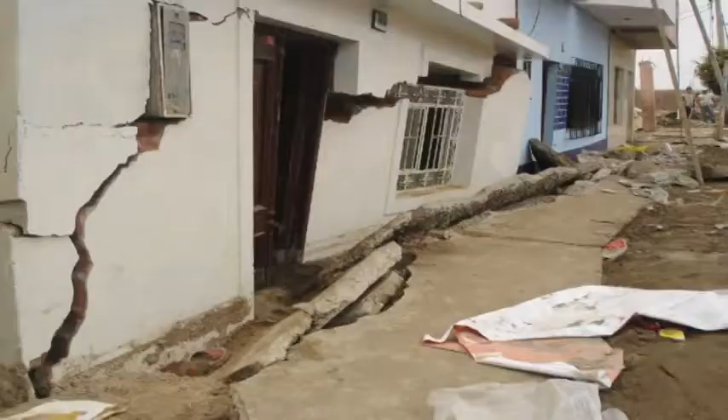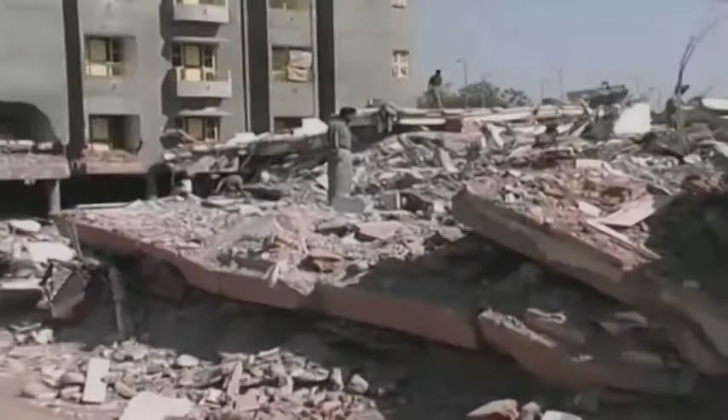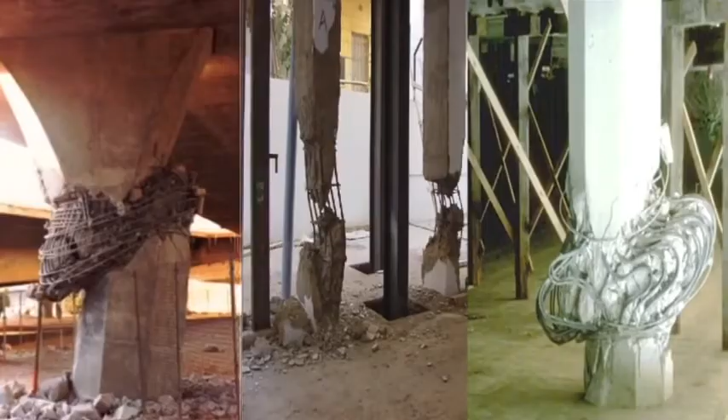Nature has its own unique way of testifying our survival on this earth, and for that, we owe a lot to the building construction fraternity. India has the testimony of robust infrastructures, heritage buildings, monuments, forts standing intact for centuries, yet their resilience to earthquake shaking is shrouded in mystery. Earthquakes strike suddenly without giving us much warning, and they occur in all seasons of the year, mostly in some predefined areas of the earth's crust, at any time of the day and night.

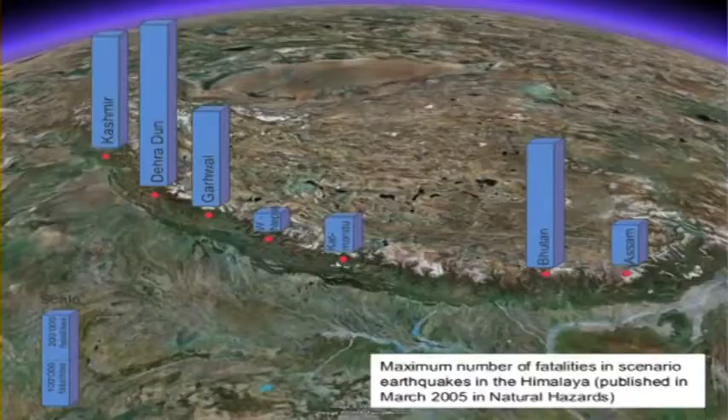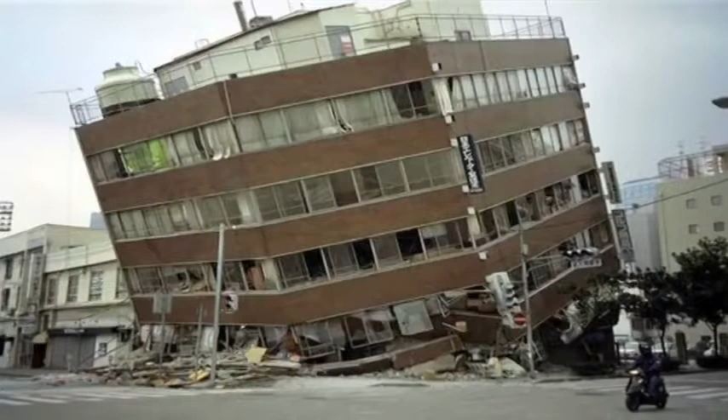Safe buildings are the backbone of human coping capacity for healthy living, but their resilience to earthquake shaking is not really known to homeowners. India experienced four M8 plus earthquakes between 1897 and 1950 along the Himalaya, which is the rarest in the world for any country. The loss of life and property damage due to Latur in 1993, Bhuj in 2001, Kashmir 2005, and more recently Sikkim 2011 earthquakes have seriously exposed vulnerable built infrastructure in the country. The irony is that while such earthquakes killed tens of thousands, the same could hardly have any serious impact in Japan or California.

This means, given the vulnerable conditions prevalent in our built environment, our earthquake preparedness and its accountability need thorough auditing. And for that, we must ensure quality construction and monitoring of upcoming buildings as a first and foremost step towards earthquake resilience. This film on NIDM is the most comprehensive source on individual, family and community preparedness. The aim of the film is to provide the public with the most current earthquake preparedness information available, suiting the Indian built environment and temperament.

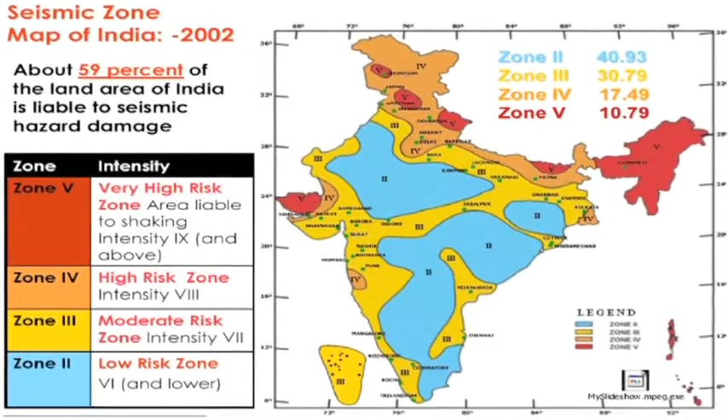Are you living in an earthquake-prone area of the country? Do you know that about 59% of the country's land area is severely earthquake-prone? Is your building safe? Is it possible to live with earthquakes? Yes, it is possible. This video provides a step-by-step approach to earthquake preparedness. In India, as many as 38 cities with a population of over 500,000 each are located in seismically active zones 3, 4 and 5. This includes the four megacities Delhi, Kolkata, Mumbai and Chennai. Considering the large number of unsafe buildings and high population density in cities, any earthquake of even moderate intensity would cause catastrophic damage to people, property, and infrastructure.

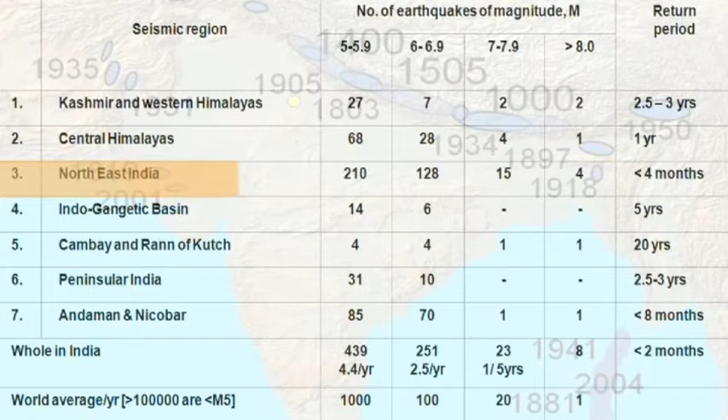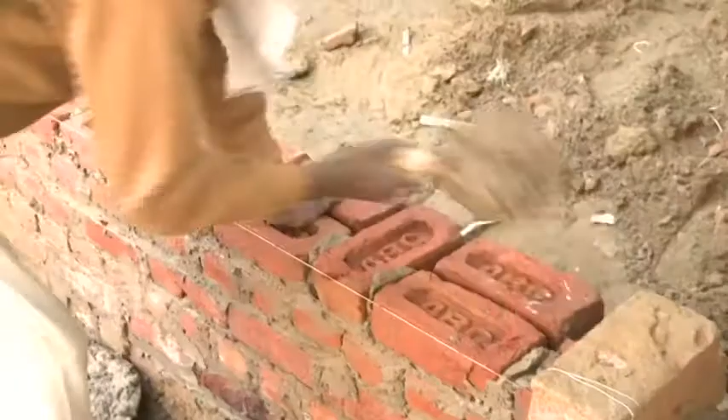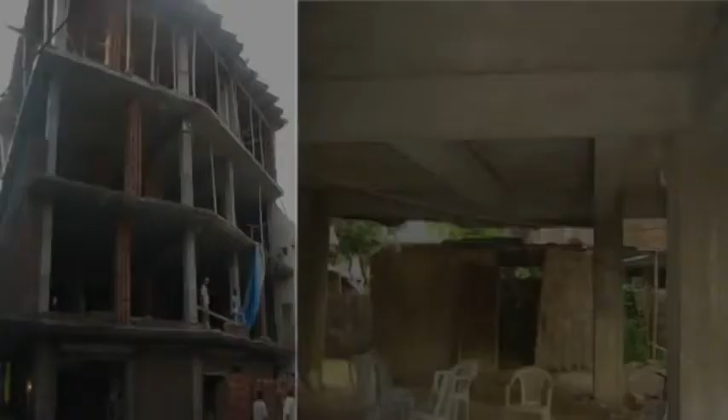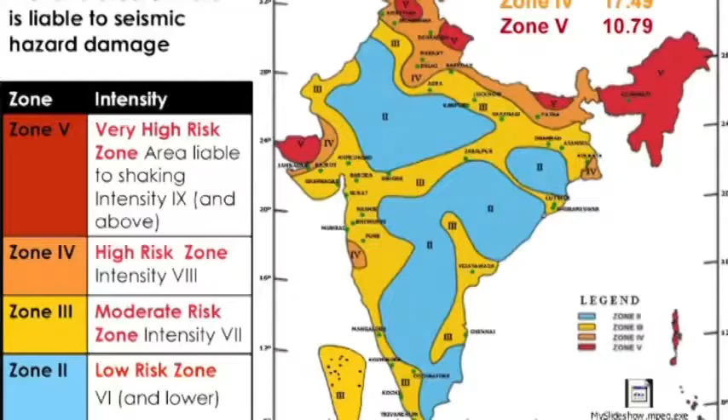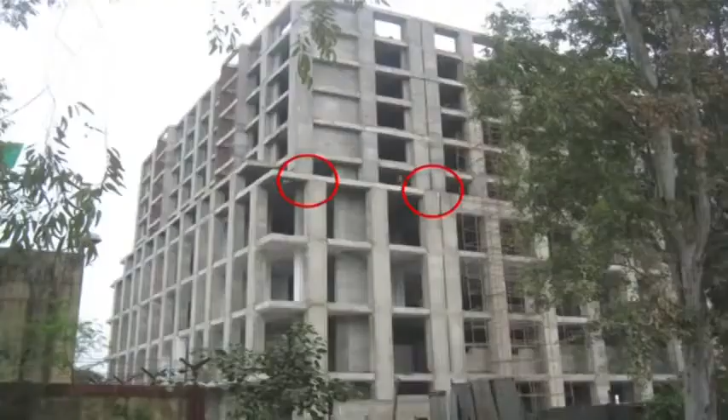Building construction in the country is mostly managed by the unorganized sector, and enforcement of building bylaws is a bigger issue than ensuring safety standards. Irregular geometry in elevation and plan, improper positioning of beams and columns, out-of-frame partition walls, etc. make buildings more vulnerable to earthquakes. Some of the features in buildings that become easy targets for earthquakes are: in 29% of India's geographical area, including Delhi NCR, buildings with bricks and stones as load-bearing walls are not earthquake resistant. Multi-story RCC framed buildings in many new urban areas have stilt or soft stories, irregular columns, inadequate shear walls and foundations. These are vulnerable to earthquake shaking, which needs a check on their expected performance.

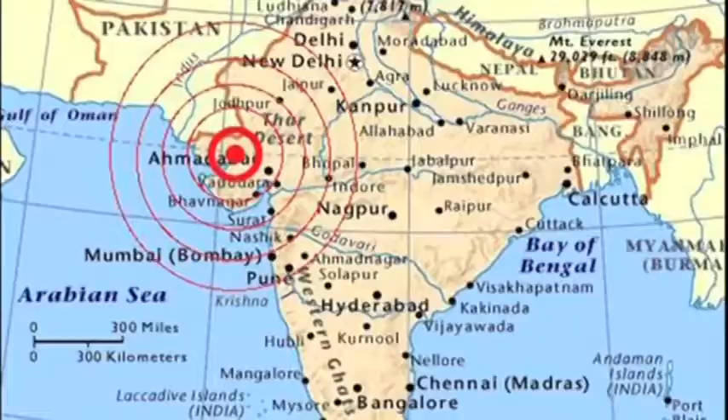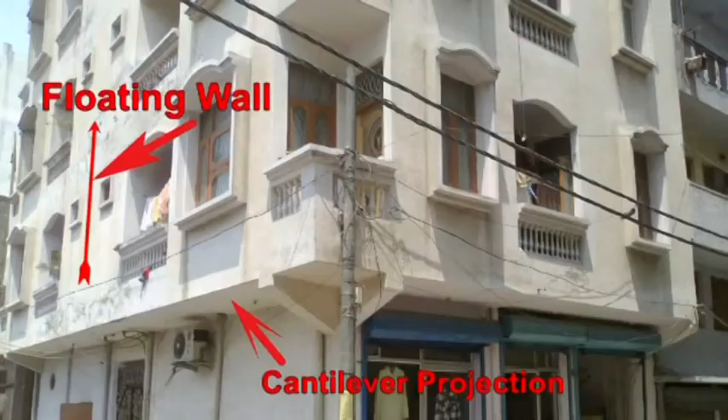For instance, the Bhuj earthquake in 2001 affected many multi-story buildings in Ahmedabad, which is more than 200 kilometers away from the epicenter. Chances of such buildings in Delhi NCR getting affected by earthquakes in the Himalaya are high. Buildings having irregular plans, elevations, floating walls and cantilever projections are severely affected by earthquakes. Buildings constructed along property boundaries with eccentric footings become more vulnerable due to the pounding effect. Buildings that are poorly constructed, extended, or altered without proper expertise are vulnerable to earthquake shaking. Seeing these vulnerable buildings in earthquake hazard-prone areas, it's really difficult to bring accountability to building performance.

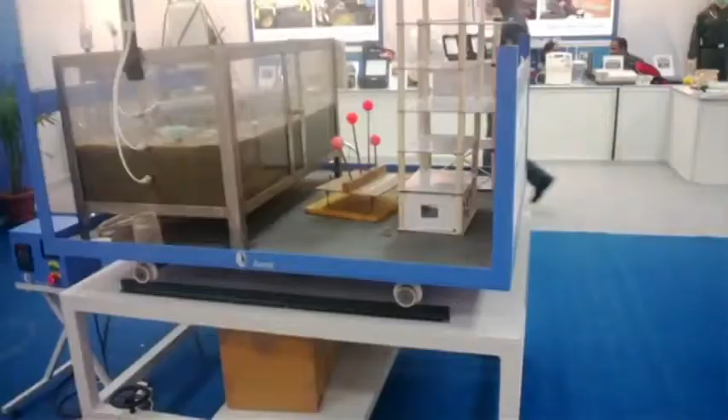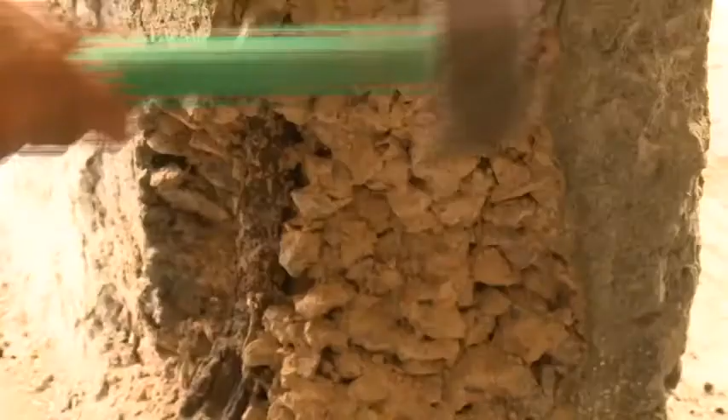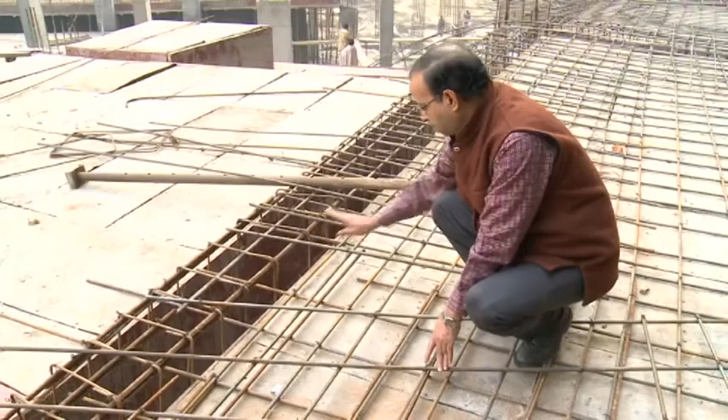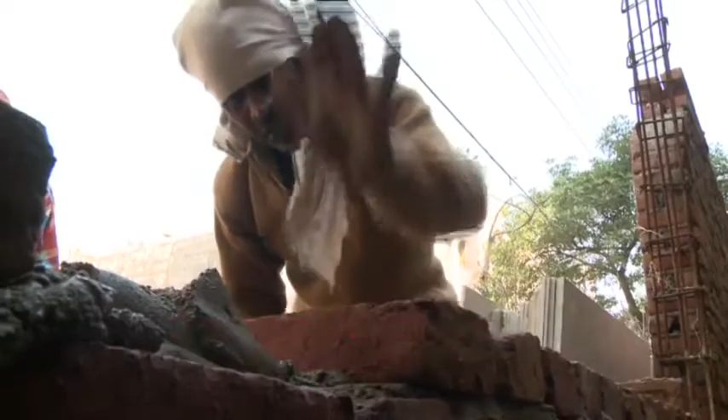Homeowners and common people are not much motivated to take up this challenge, possibly because the earthquake is a low probability event. But destruction caused by moderate, that is M6 plus, earthquakes in India has been far-reaching because our buildings were not constructed as per norms. The fragile built environment must be checked or reviewed, and can no longer be overlooked. Hence, preparedness in terms of building response to future earthquakes will be an implausible mind game till we start looking at quality assurance in ongoing constructions as an immediate step. As far as understanding of earthquakes goes till date, no one can prevent earthquakes from happening again. But preparedness and safe building construction practices can certainly reduce the extent of damage and loss. Therefore, it becomes imperative to construct at least our own buildings as per the methods prescribed in Bureau of Indian Standards codes.

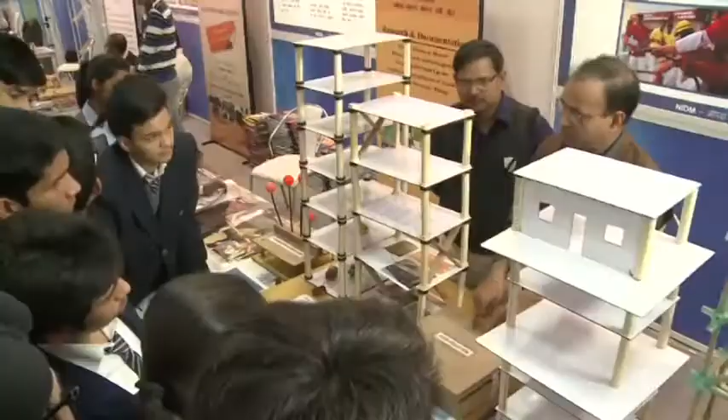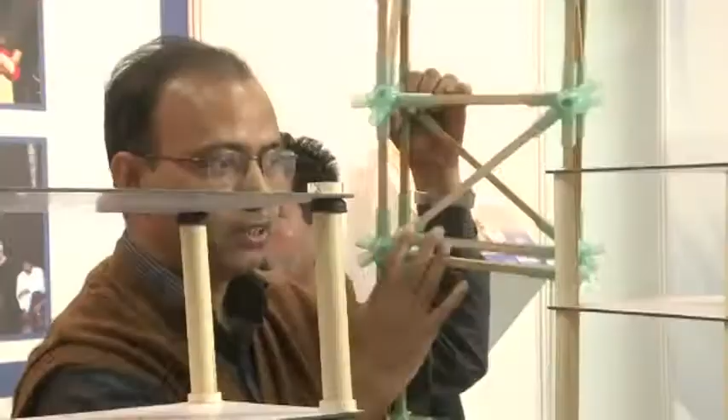It is true that NIDM and many other institutions and organizations such as IITs, BMTPC, CBRI, NITs have embarked upon several awareness campaigns, including mega earthquake drills by NDMA. Yet, mass-scale capacity building of the masons, who are closely akin to common people construction, needs more emphatic campaigns than anything else. Let us look at some of the important aspects that can have a direct bearing on the safety of the buildings.

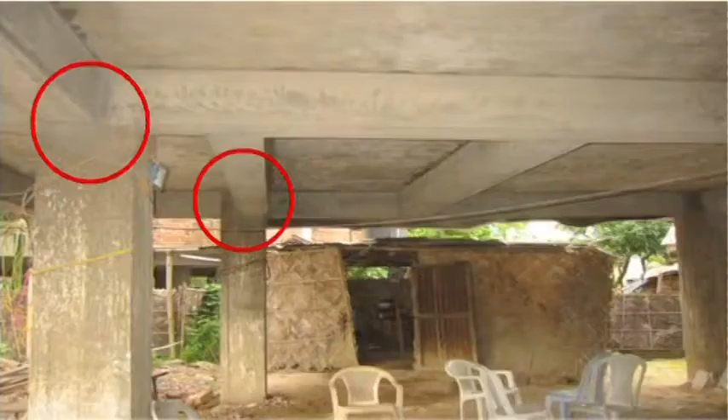Rooftop water tank not firmly connected to the main columns. Multi-story apartment building with car parking in open or stilted floors. Building with wide ventilations and extended open veranda. Horizontal extension or modification in buildings by disturbing load-bearing walls and columns. Beams and columns not positioned centrally.

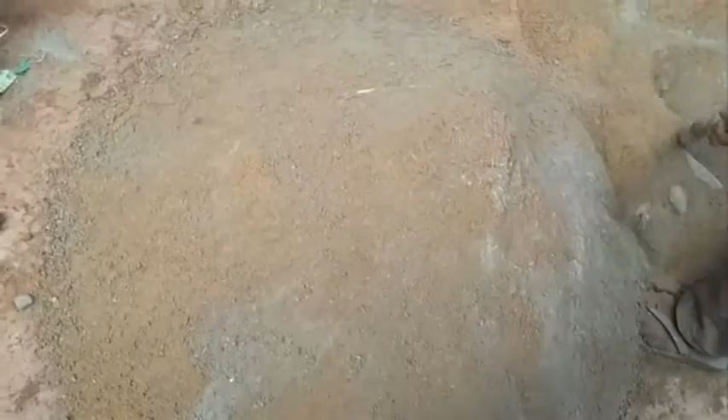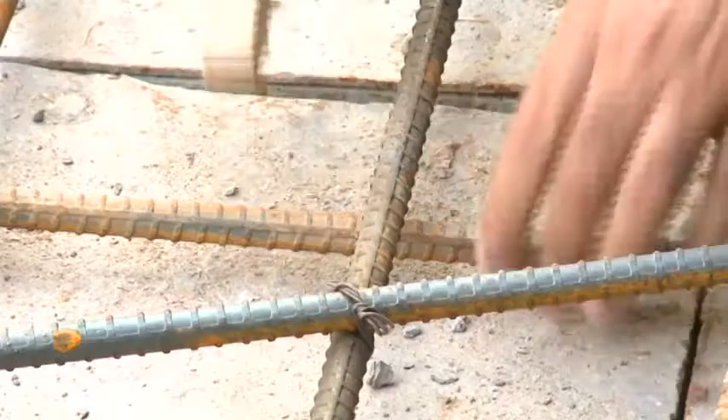Hidden beams and flat slabs not conforming to design standards. Poor quality construction materials and concreting, mostly handmade. Floating walls and columns. Facade and cladding that conceals construction defects. Beam column joints not conforming to standards given in IS codes. Adding of floors and concreting without proper curing. Clear cover for concrete not being maintained.

Compromising with the size and shape of beams and columns while giving too much importance to architectural beauties and interiors. Signage, towers, mumties, etc. not firmly attached with structural members. Colonies in areas with three sides closed and very little space for emergency operations. Tall buildings beyond the reach of fire tenders without designated fire escape and mandatory firefighting devices as per BIS code. Inoperative firefighting installations in many buildings of strategic importance.

Earthquake happens, we cannot stop earthquake from happening. Earthquake generates waves, but how do waves affect our buildings and establishments? This model shows you how these waves are transmitted to the building. So you can see that when an earthquake comes from a distant place more than 200-300 kilometers away, it will affect the building. See, the tall building is getting affected from the distant earthquake. But a local earthquake within 30-40 kilometers will generate high frequency waves, and you see the taller building is not affected, the shorter building is affected severely.

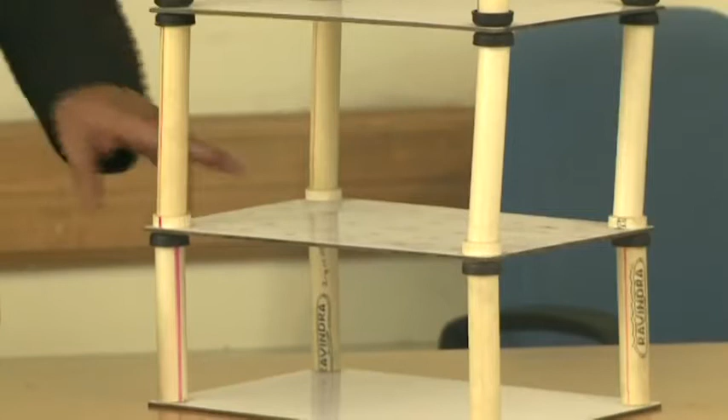But when these waves come, we have some device to stop these waves transmitting to our building. In that case, this is a small device for base isolation. You see, this is a base and this is, say, the building. Here I am giving a vibration. And you see the difference, the movement of vibration that I am giving at the base is not coming over here. Now you see this is a 4-story building, first floor, second floor, third floor, fourth floor.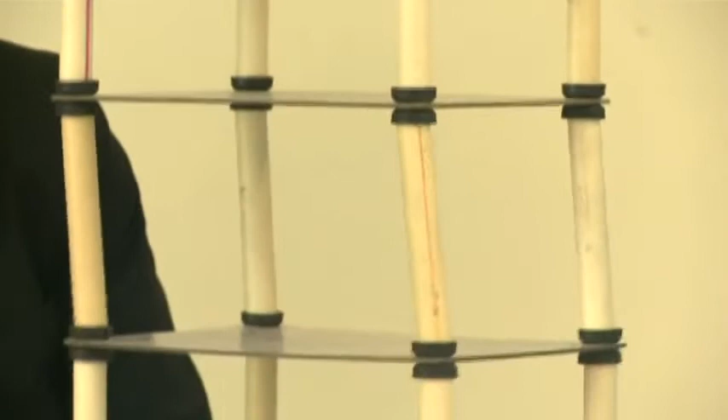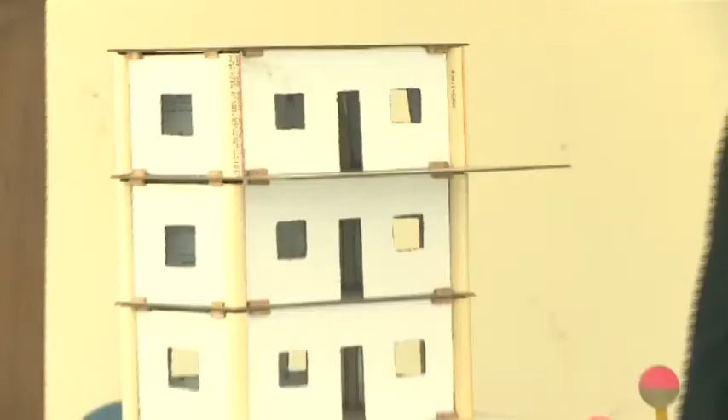When it is vibrating, when waves are acting on this, you see that each and every component is agitated here. Depending on the height, somewhere it is stiff, somewhere it is very flexible. This building is a typical G+4 story. And here, this building, when it is vibrated, these are the same height. But these are typical with open veranda and other things. And you can also see that here the doors and windows are placed as per code, at the center. And when vibration is being given to this building, you see, the vibration is completely different than this one.

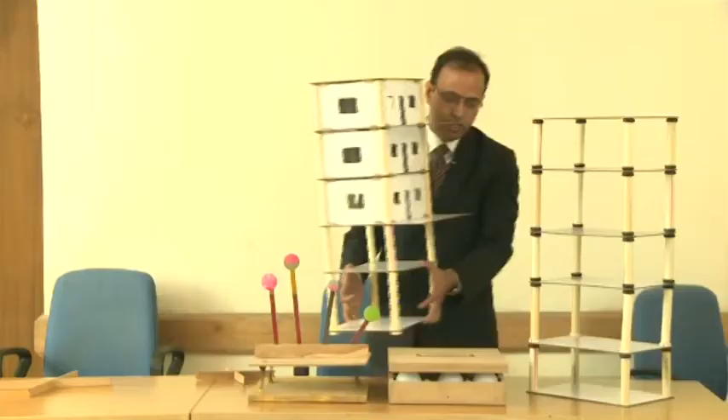But when I keep this building over the base isolation device and give the vibration, you see this vibration is not at all transmitting to the building. So these are the devices which are used. In fact, in India, after the Bhuj earthquake, Bhuj hospital has been reconstructed using this kind of device. So through this model, you are able to see that earthquake vibration comes depending on the distance, and its effect on buildings in a certain locality is different. Vibration we cannot stop, but we have some devices and technology to stop its transmission. But this technology is very costly. There are several other technologies and know-how available by which you can make your building earthquake resistant.

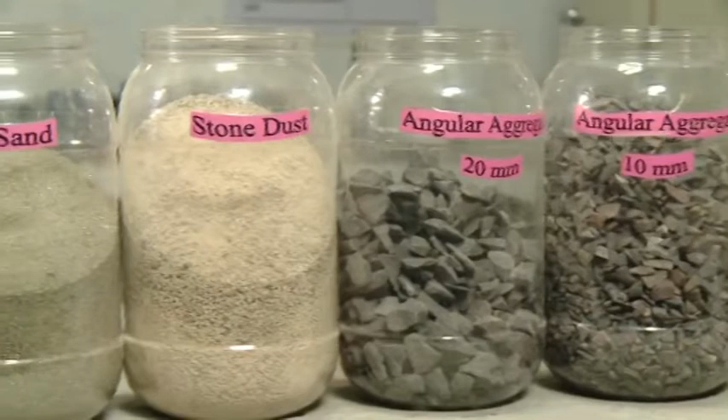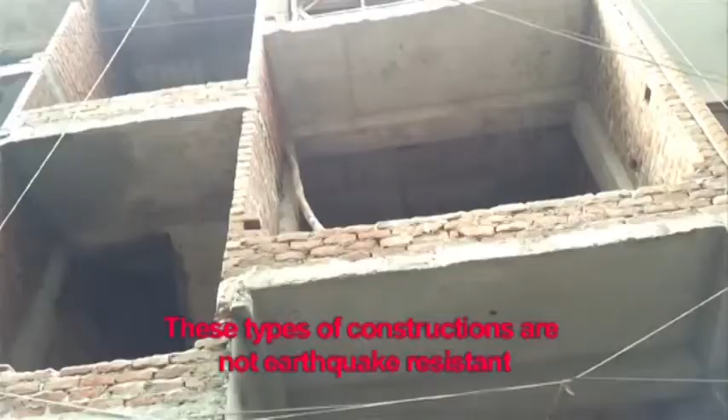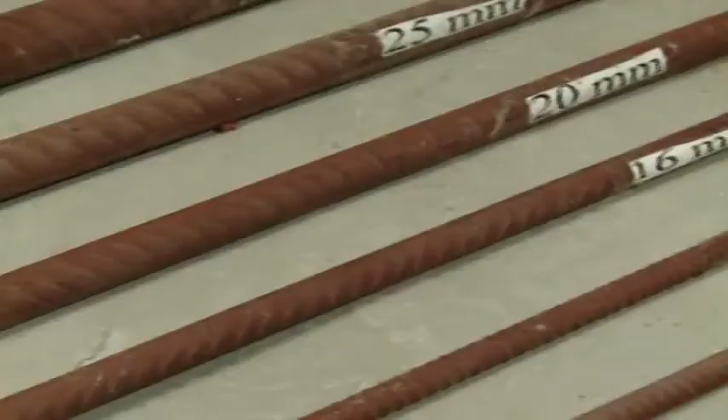The material used for the construction of a building plays an important part in ensuring its safety. Therefore, the choice of quality construction material is of paramount importance. You should always buy building materials from standard shops and should not get carried away by anyone or by the idea of cheaper or local alternatives. Structures made of substandard construction material may save you some money, but will result in a building which will fail to withstand the onslaught of an earthquake. You can ensure the safety of your loved ones by providing them earthquake-resistant houses and buildings made from quality construction material. And for that, you must rely on prescribed codes and standards under the supervision of building experts.

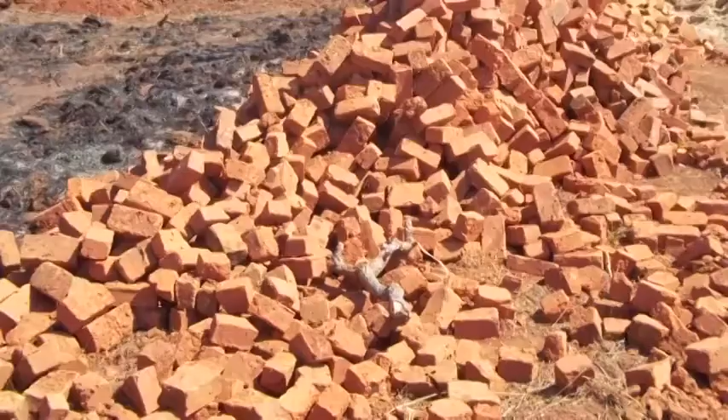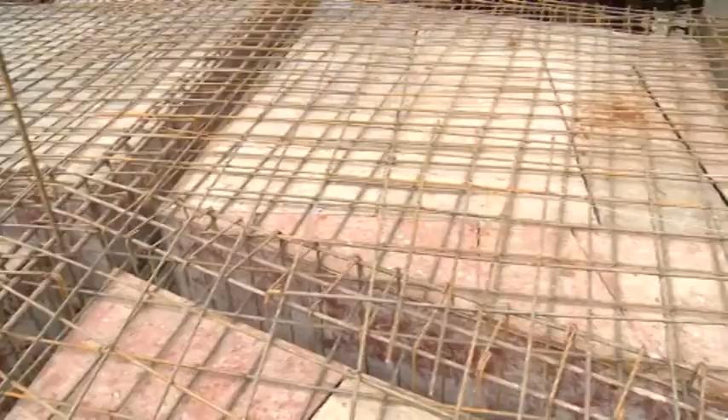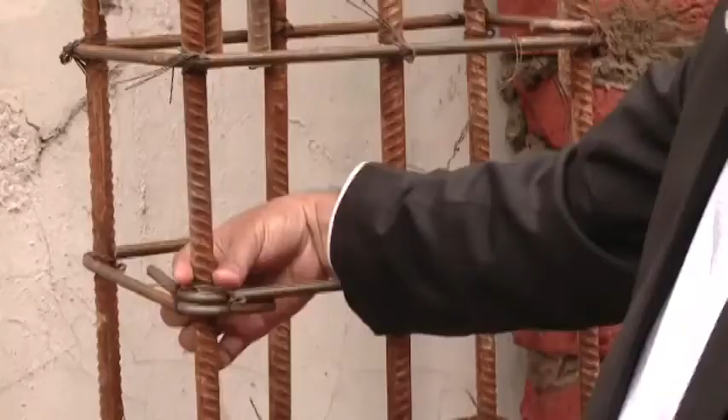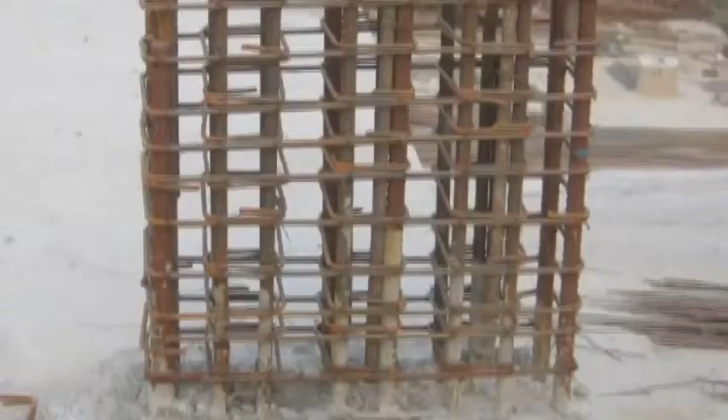Once again, buying the best building materials from the open market does not ensure earthquake safety to your dream house. You need to take advice from an expert civil engineer on record, under whose supervision all architectural and interior requirements, foundation, basement facilities, bar bending, concreting, curing, plumbing, electrical wiring, etc. are to be ensured. For new constructions in earthquake-prone areas, extra costs generally should not exceed 10% of the total. In many cases, too many precautions are taken, for which cost may increase substantially. But earthquake-resistant measures have to be just appropriate, not too much and not too little.

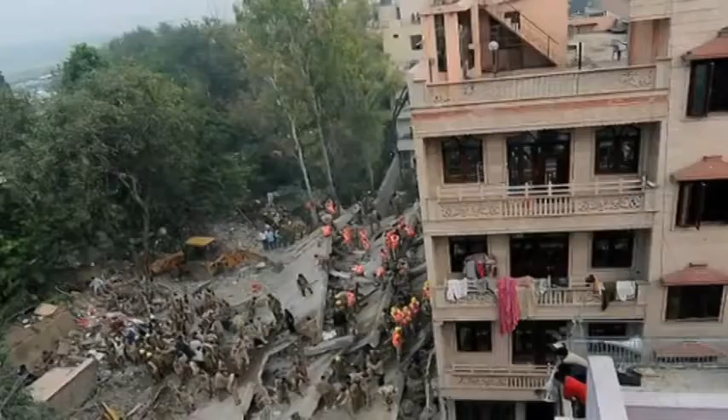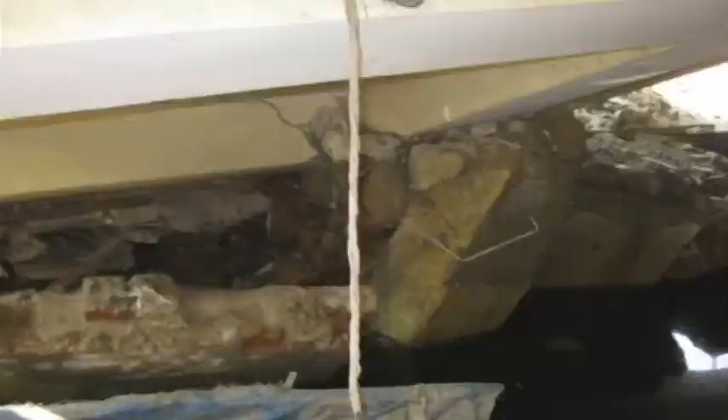Many of you must be spending a lot on high-quality steel and thinking that your house will be more safe. It's not true. One of the reasons for the Lalita Park building collapse in East Delhi was too much reinforcing bars. Even more than 25 mm diameter were used at one beam column junction, which failed suddenly. The concrete at that junction got weakened due to prolonged saltwater intrusion caused by waterlogging.

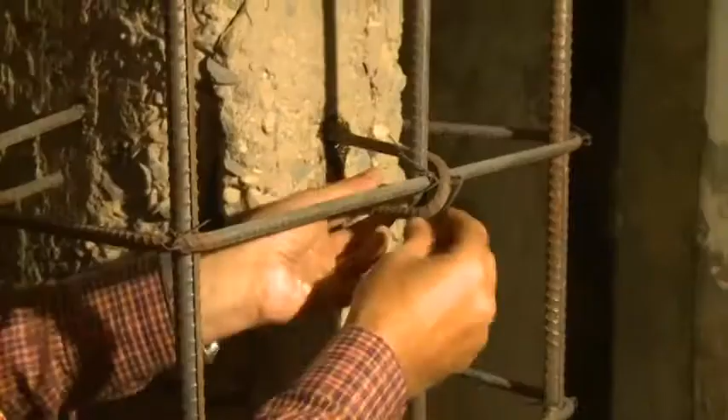For the existing house, you can get it assessed and seek advice from experts. Some aspects even you can check by yourself. Are you living in a multi-story apartment building with open story or stilt parking? Experts can help in retrofitting the same.

Is your house constructed on loose sandy silty soil without tie beam and proper foundation? They can be strengthened to carry even extra load from an extra floor if required. Is the bar bending schedule followed during construction as per code? At least ensure that all tie bars are of 8 mm diameter and their ends are bent at 135 degrees. Is there any modification or extension or alteration done to your building? Is your building occupying full plot area with 3 sides closed?

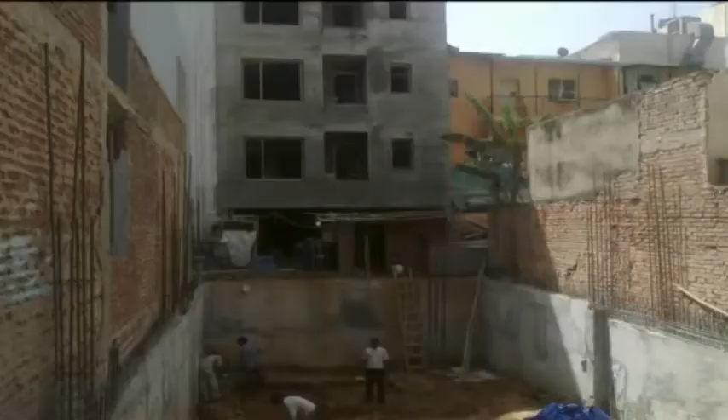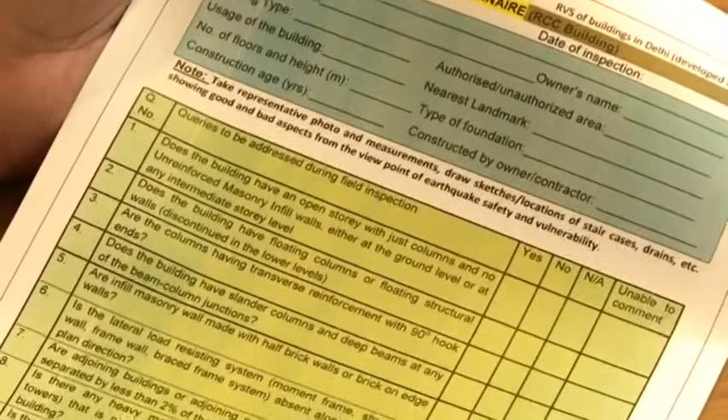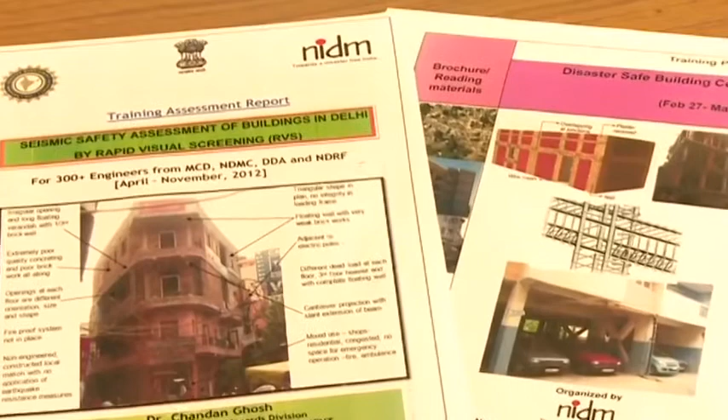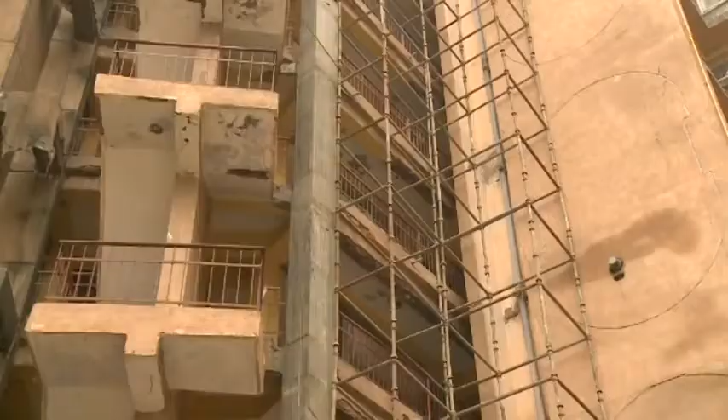Based on many such points, NIDM has prepared an RVS format with 25 questions with which you can provide first-hand information or report on the earthquake safety of your house. Based on the report, a decision by experts can be taken whether to retrofit or let your house remain as such. The Ludlow Castle School building in Delhi was retrofitted in 2006 with expenditure well within one-third the cost of reconstructing it. In the same manner, you can also retrofit your houses by spending only a fraction of the actual expenditure needed to rebuild it. But behold that your house must be evaluated by expert civil engineers.

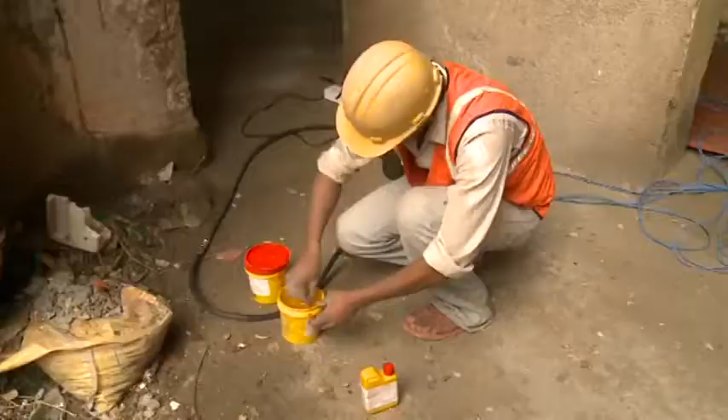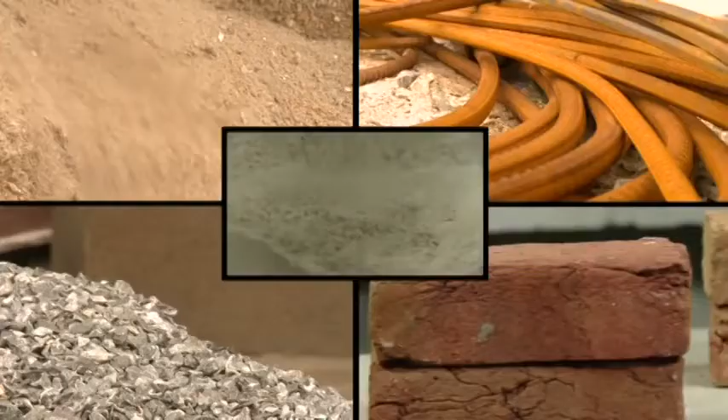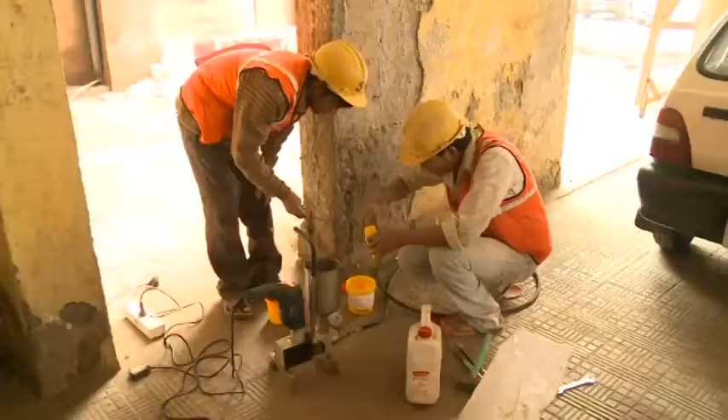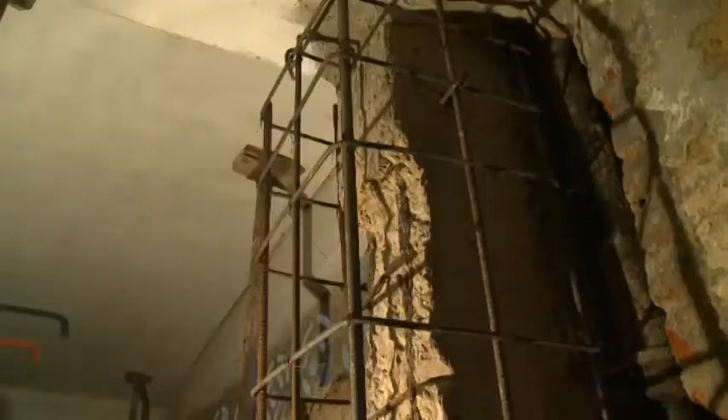In the name of retrofitting, many agencies are coming up, but be sure of their expertise. Get advice from NIDM. An amateur and technically lacking construction worker or contractor is unaware of the steps and precautions that ensure a safe structure against earthquake. It is not difficult to build or construct an earthquake-resistant building. Do not ignore or compromise with the structural safety of your building. Constructing new earthquake-resistant structures or ensuring the safety of the existing ones by the technique of retrofitting entails only a fraction of the original cost, but it goes a long way to ensure the safety of you and your loved ones.

A civil engineer technically equipped to make your already built house into an earthquake-resistant one is to be approached for retrofitting. But please note that retrofitting is not a panacea to all deficient buildings. Behold that not all buildings can be retrofitted. For poorly constructed buildings, the cost of retrofitting is substantial, or for buildings with all 3 sides closed, retrofitting is not at all feasible. For only a selected few, say those buildings having a few meters of working space on all 4 sides, retrofitting schemes can be undertaken. Even in some cases, partial retrofitting is undertaken to ensure life safety.

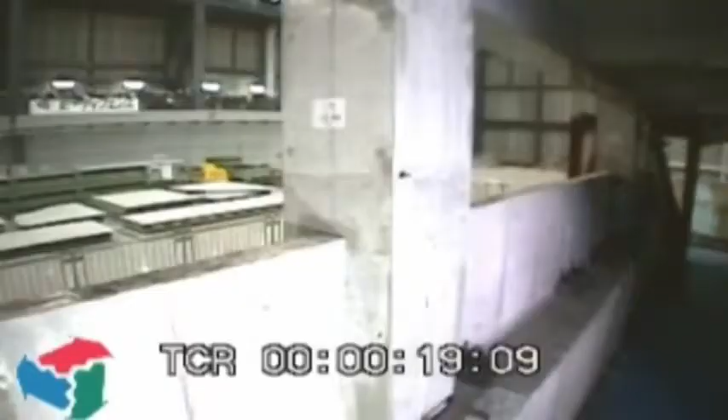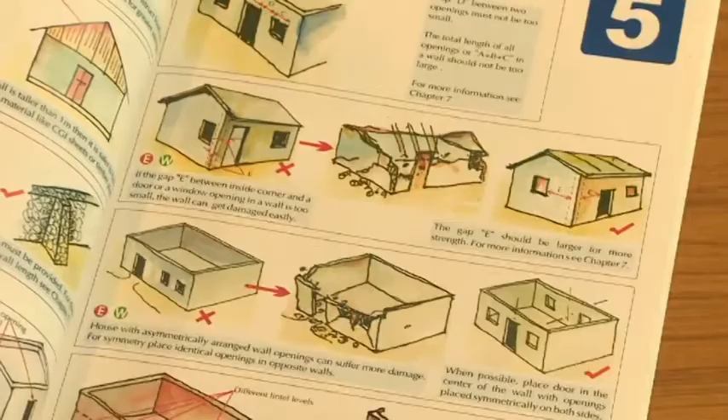To ensure that buildings coming up in your locality are structurally sound and have earthquake-resistant measures in place, let National Building Code 2005 be strictly followed. Though it's not possible to construct an earthquake-proof building, it's possible to avoid catastrophic damage. For engineered buildings, much of the damage in earthquakes is predictable and preventable. You must work together in your communities to apply your knowledge to building codes. Take expert consultation and advice. Conduct building health assessment camps, retrofitting programs, hazard hunts, and take part in neighborhood and family emergency preparedness plans. Behold that earthquakes cannot be predicted, so don't wait till another quake ravages your locality too.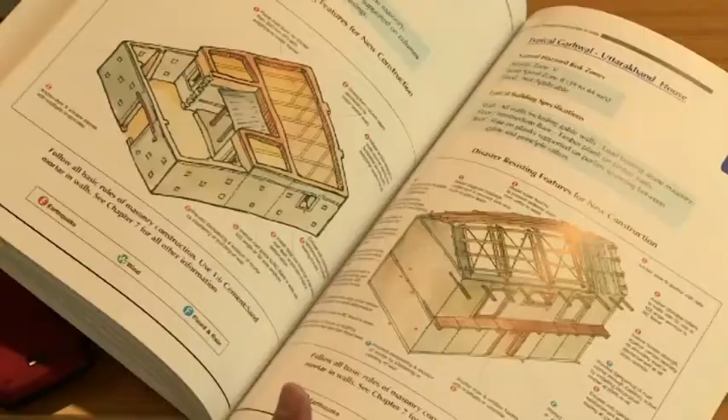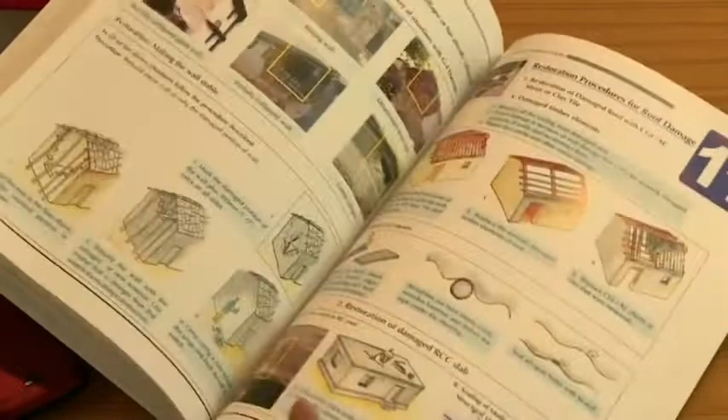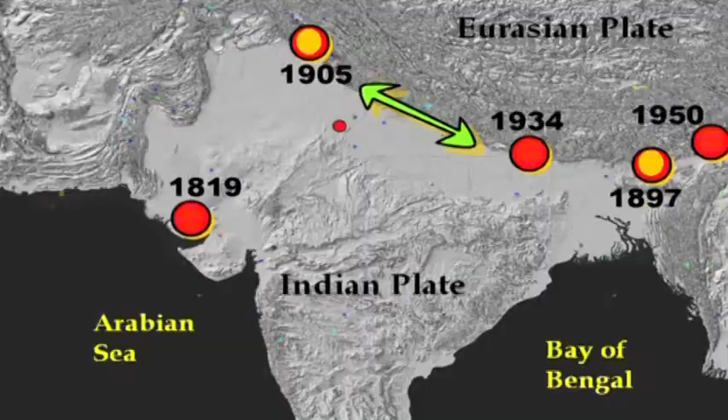Building codes are to be treated as our sacred Gita or Bible. The country needs a good number of experts or interpreters of such codes who are capable of transforming the coded version to the common man's benefit. And for that, NIDM is constantly engaged in serving such needs across the country. Always remember, it is worth being prepared at your own level rather than waiting for government action afterwards. After all, living life safely is your priority. Earthquakes do not kill. It is the unsafe buildings that cause more harm.